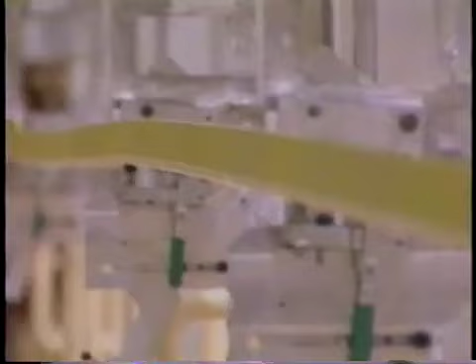Three strips of metal forming the front wing spar for the first plane were being riveted together by a huge computerized tool.

By the time this plane is completed, there will be 3 million fasteners like this one, holding together several hundred thousand parts. 18 months from today, the number one plane would have to fly.

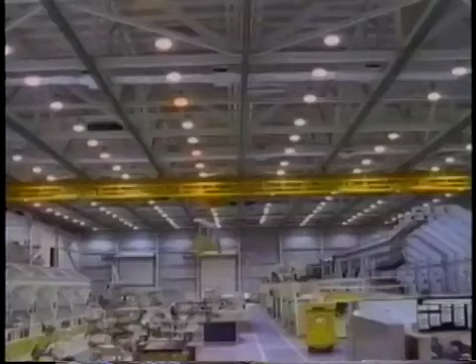But this schedule was all based on faith. Faith in a new approach to plane making that had taken an estimated $1 billion to develop. Previous Boeing airliners had sometimes suffered from costly errors in the manufacturing process. To minimize such problems, Boeing was determined to improve communications among the 10,000 people who were going to design and build the 777.

The company would adopt a new management philosophy, known by the slogan, "Working Together." For the first time at Boeing, this plane would also be designed almost entirely by computer.

The inspiration for all this came from an unexpected source. The 777 team leader recalled the lessons learned from assembling his children's Christmas toys.

Fisher-Price does the best job of any toy company on making toys that are easy to fabricate and assemble. Fisher-Price makes a little notch in their wheels so that you only can put the right wheel on the right hub, you only can put the left wheel on the left hub. You also use simple tools.

So I started saying, what we're after on this program is not just meet cost targets, not just add value to our airline customers, but we're going to do that by doing what Fisher-Price does on Christmas Eve. We're going to make this easier to fabricate and assemble.

So one time as a present, the engineering guys, after we started to incorporate all the producibility, they gave me a whole bunch of Fisher-Price toys so I could pass them out and make the points to the engineers.

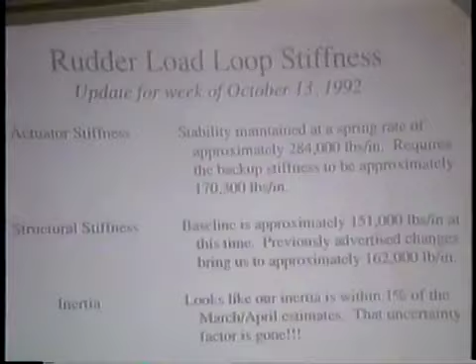Not really even close. In a computer analysis, Boeing had discovered that the rudder might develop a troublesome vibration under certain flight conditions.

You're looking at a 10 to 15% increase in rudder stiffness, or in the total loop stiffness, to solve the problem.

I'm going to head down to Australia and face the teeming masses who aren't happy with this.

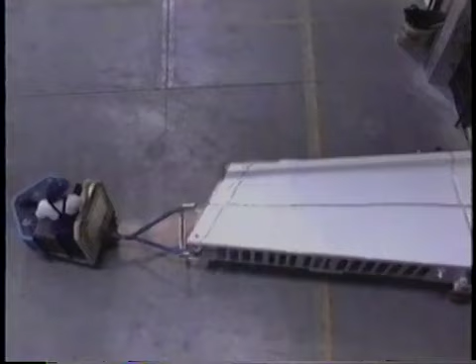The teeming masses were the engineers and executives at a small company in Melbourne called Asta. Asta had won the contract to build the rudder. Initially, they were delighted—it's a bloody big job. They were much less delighted when they got the news that the design was being changed after they were already underway on the prototype.

The rudder consisted of many carbon fiber layers laid in a precise pattern and then baked in an oven. Much of their effort to date was now wasted. I was cheesed off to blazes because of this change.

I'm not exactly that happy today because we set out to achieve a whole series of things with this particular rudder skin. We'll achieve most of them, but the thing that worries me a little bit is that the configuration will change, and it's going to change fairly dramatically. We still have to deliver on schedule. We've got a requirement to deliver this rudder in the middle of next year, and if we're late on that, it puts Boeing in a bind, and we don't want to do that if we can possibly avoid it.

In any large airliner, the rudder plays an important part in controlling the sideways movement of the plane. In the 777, powered by just 2 large engines, the rudder had a particularly important job to perform. On this particular airplane, the key task is to allow us to keep the airplane flying in the right direction if we lose an engine on takeoff. With a large twin engine airplane, it's a key part to making the whole system work.

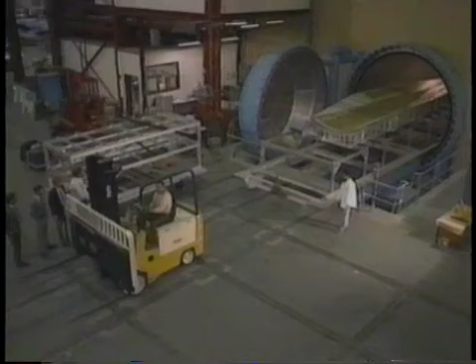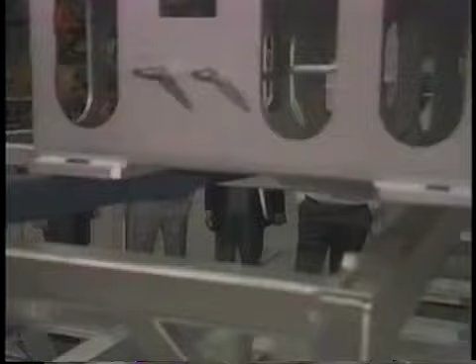The problem was an unwanted vibration involving the rudder and the piston that would move it, called an actuator. Asta was now behind schedule, but the rudder was such a key part of the plane, it had to be delivered on time or it would hold up the whole assembly and testing process. The Asta team met to discuss the situation.

What we really have to address is quite clearly the effect of all these changes that have been brought on to us by Boeing. Lovely company though they may be, they've given us a real problem insofar as building this rudder to schedule, because the changes effectively are the skin gets changed by the addition of something between 2, 4, or 6 strips or plies of tape plus some additional fabric. The actuator fittings in the actuator area become titanium, and there is a whole lot of extra machining on some of the other ribs.

There were major concerns at Boeing over whether or not the rudder would be delivered on time. Any delay could throw the whole plane off schedule. As the newly appointed director of engineering, Ron Ostrowski was worried. It complicates schedules for certain, because we wouldn't have anticipated having this problem this late in the game. We wouldn't want it this late. So, like Asta in Australia trying to produce the rudder, if we have to reinforce it, it affects them.

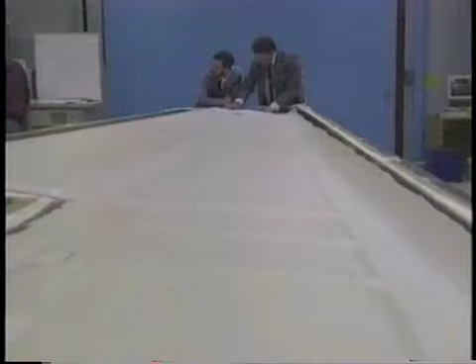But these things crop up, you know. There will never be an airplane that's perfect right out of the chute. It's too complex a vehicle to ever expect that to happen, and changes occur, and we have to just recover from those as they happen.

We've had 2 major redesigns so far, and whilst this one looks good, the previous one, the solutions there looked good too. Hopefully this one's better and this solves the whole problem, because after this, I don't know what the hell we would do if there was another stuff-up.

Another design change, or stuff-up as Tyler put it, was all too likely. Only time and further testing would tell.

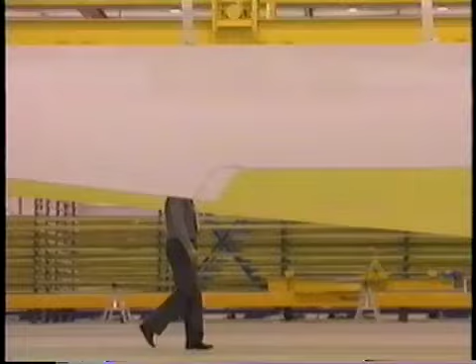In Boeing's own plant, north of Seattle, a giant machine was lumbering into action to assemble the first plane. Within a 30-mile radius, Boeing had a number of plants that were making various components for the plane. The components would then be shipped to the main plant for assembly. This is one of the largest single pieces of the plane, a carefully shaped aluminum wing panel stretching 100 feet across the factory floor.

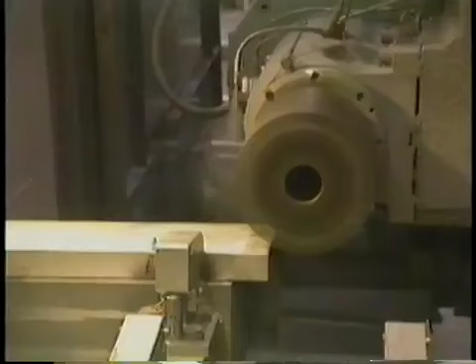The plan was that major sections of the plane, starting with the wings, were to be assembled from hundreds of smaller parts, which would be milled and shaped in the various Boeing plants. The larger sections would be transported from where they were built to the final assembly line. Between each of these stages, the growing plane would be moved from one part of the assembly line to another by a series of enormous cranes. In final assembly, the last stage before the plane left the building, the 777 would acquire its two huge engines.

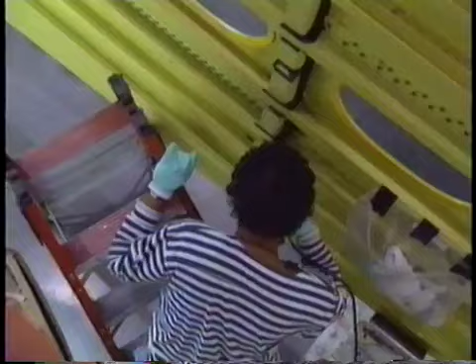But that was still 9 months away. As the first wing took shape, individual pieces were being sealed so the interior of the wing could act as a fuel tank. Glenda Barnes was one of the wing sealers.

The working together approach had definitely affected her job, compared to the way things had worked in the past. I'm a sealer, and if there was a certain bracket, such as this one, that I knew as a sealer did not need to have seal on it, but the plans as of now said to seal it, well before, I would have to submit a request stating why, and then that would have to go from one place to the next, and by then, there's 2 or 3 airplanes that's out the door, but this bracket is sealed. Now, I can pull together with the other team, and I wouldn't have to seal this bracket today.

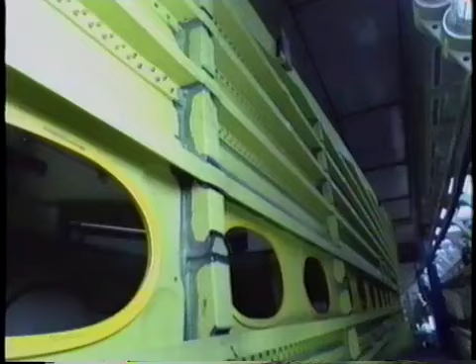That's how fast some things can happen now. Say after I have done my first two processes, I have to call quality control to come look at my process, and they thoroughly go over it to make sure I have sealed in every place I should. If I haven't, they will tape it and let me know. If I have, they give me the okay to go to the next process. I get upset sometimes if I miss something, but we all have good days and bad days, and they are there to find those things I may have missed.

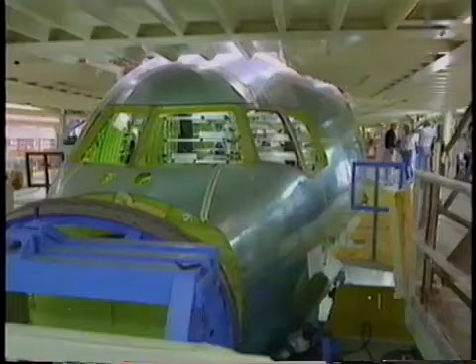Boeing calculated that their new methods had meant an 80% reduction in the sort of errors and changes they had experienced on previous planes. The floor beams had come together with an accuracy down to the 4th decimal place. They held the seat tracks, which were made of aluminum, except in the galley areas where a corrosion-resistant titanium was used.

The reason it's more subject to corrosion is spillage of pop, Coca-Cola, beer, wine, that type of thing. It's very corrosive to aluminum metals, but not to titanium.

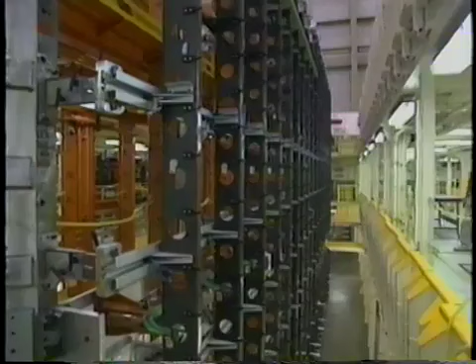You want to make sure that the seat is always held. This is one of our areas, and I know it doesn't look like very much, but it's a very concentrated area for stress when the seats, in a crash load or something like that — it's very difficult. You have to make sure you can survive a 16G crash.

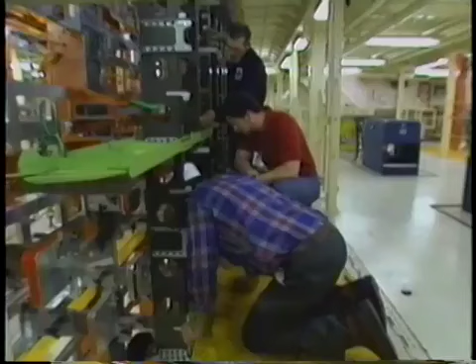In the past, the designers in their offices would have designed a component and then washed their hands of it once the drawings had gone to the factory floor. Now, they were involved throughout.

That's really interesting there — we have some manufacturing engineers working with the mechanics. These guys are from the office building, the engineers from over there, and they're coming out talking to the mechanics, something you would never see in the past.

It is absolutely the only way of doing business. Before, I couldn't find an engineer, and now today I have to ask them to leave so we can build. They have to just quit designing so we can build.

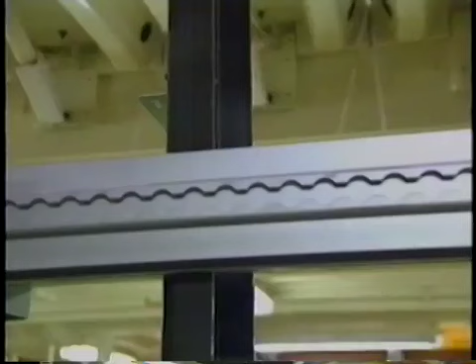The floor beams were made of carbon fiber composite, very light and very strong. A guiding principle in the design process was building a plane as light as possible to minimize fuel consumption and reduce running costs.

Wherever possible, the team looked for lighter materials that could substitute for more conventional ones. But in one case, this got the 777 team into trouble. The design of some parts of the plane called for using a new metal alloy called aluminum lithium.

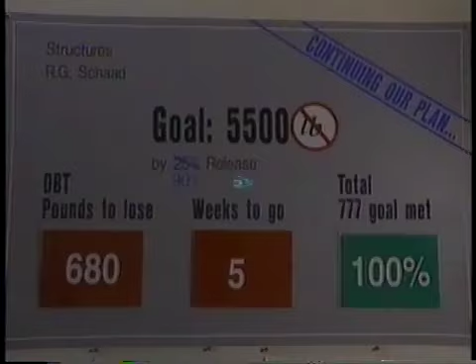Aluminum lithium was to be used in a whole range of areas in the plane. It was expensive, but it was also much lighter and helped the plane meet its weight requirements. But long after the decision had been made to go with the alloy, they discovered a problem: the new metal developed small cracks when it was drilled.

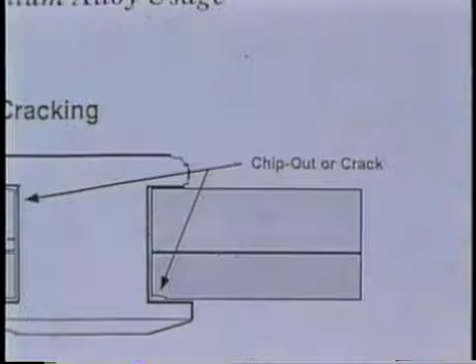Cracks are a very sensitive issue, as you can imagine in airplane design, because we go to great lengths to not have cracks, because cracks usually mean the crack can propagate or get bigger. Plus, we go to a lot of detail to make sure that if a crack does get started, we have ways of stopping it so it doesn't grow. It's just part of our normal design process.

The issue we had with aluminum lithium is that for the applications we were using it, the cracks were technically okay, but you could see the crack. So how would the customers feel about that? They could see the cracks. We'd have to say, on these parts, Mr. Airline, the cracks are okay. And they would have to figure out how to communicate that to all the people who interface with the airplane.

It was time for a decision. Already, the factory was preparing to manufacture parts with aluminum lithium. A meeting was called of all the engineers involved. Before the meeting, the halls were buzzing with rumor and comment.

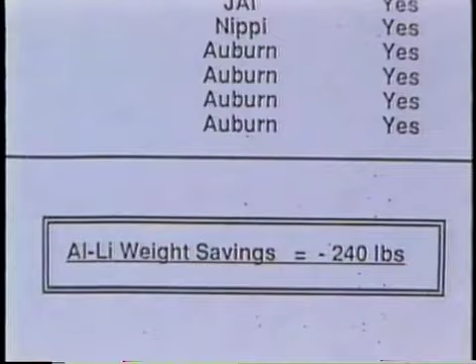They're talking about cancellation costs of like $2 million for a bunch of the applications we're talking about. And I think at the aluminum lithium meeting, we all had both opinions in our minds at the same time. It'd sure be nice to just go ahead and get that weight in the bag and done. It would sure be nice not to give the airlines and ourselves an extra problem. So you've got to be very careful not to make up your mind, and let all the different sides of the issue get out in the open, then collectively use your strength to make the decision.

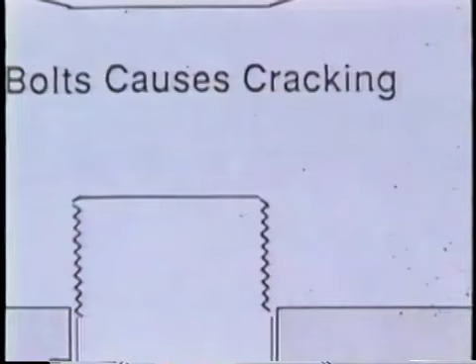So the way we try to get the best decision is to get all the pieces out on the table, see what's new, see what that means to us, can we do something about it or not? And then usually that thorough discussion leads you to the right direction. You're going to have parts here that sooner or later it's going to be discovered. Major or primary structural components like Section 12 rib stiffeners, which the airlines for 30 or 35 years, when they find a crack, they figure they don't fly till it's fixed. I don't know how big the crack's going to be after 5 or 10 years, but you have the potential here of developing multiple parts that are going to have minute cracks in them, and to the airlines, that's not an acceptable structural configuration for the airplane. It's acceptable if Boeing says it's acceptable.

Well, you've got a basic material characteristic you know about already. For example, you know you can't use it in sheet. You know you can't use it in plate. You know you can't use it in some kind of extrusions. Two more just fell off for whatever reason. You know, the handwriting's on the wall. It's just something that I think you need to listen to.

The data. Maybe I'd like to say a few words since Brian has had a chance to talk about this. The fact is that from a technical point of view, I would not put this back on the airplane if I had a choice, because we know more now than we did when we made the decision. On the other hand, I do remember that 240 pounds is still an extremely valuable weight saving for this airplane. And if we take this 240 pounds out, then I don't know where I'm going to get it. We've worked extremely hard to save weight, and we're going to continue to work hard to save weight. And so it's a balance.

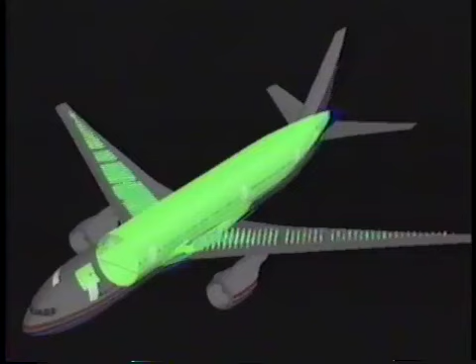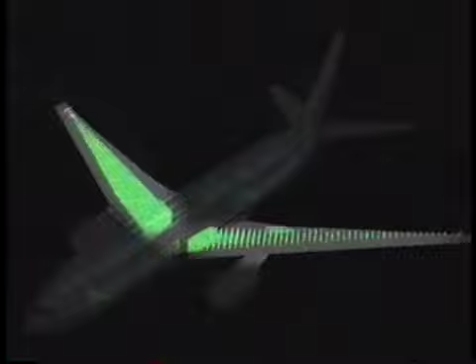The Japanese were manufacturing 20% of the parts for the 777. Some of these were supposed to have been made from aluminum lithium, including key components of the wings called in-spar ribs. Nippi, the company making the ribs, had scrambled to redesign their machine tools so that another metal could be used.

These trips turned executives into 24-hour-a-day workaholics. Business and noodles became hopelessly intertwined.

The group was thinking ahead to its visit to Nippi, just two days away. I have the materials for Nippi in my briefcase. Now, when did Nippi ship the in-spar ribs? On the 30th. Have they arrived in Seattle? Yes, they have. I saw it.

I like that. You can eat sushi with fingers too. Try it sometimes, it tastes better. I've ruined 26 neckties, and now she tells me I can eat with my fingers.

You bring the bottom end up, and then it doesn't slap around. I see you slurping. Let's all watch Neil slurp it. Want me to do it? I want you to do it. Extraordinary. Not all those, you'll never. Wait a minute, I bite them off. No, you're supposed to slurp them. Oh, look at that. Now I know why you got to be a vice president. Yeah.

Many people, including some employees, wondered why Boeing had involved the Japanese at all. Building large aircraft was one area of technology the Japanese had not yet developed. Yet here was Boeing operating on what some people called an open kimono policy.

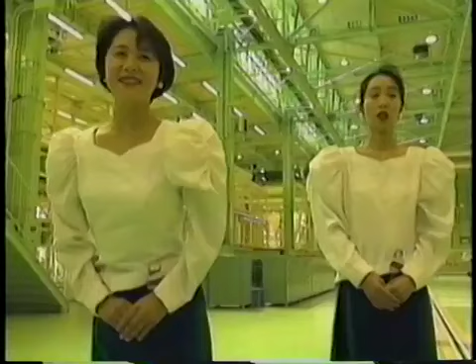But for the 777 team, this collaboration provided access to high-quality heavy engineering and equipment. Kawasaki had constructed an entire factory just to make parts for the 777 fuselage, and part of the purpose of Standall's visit was to attend the opening ceremonies. No such occasion could be allowed to pass without a Shinto religious ceremony.

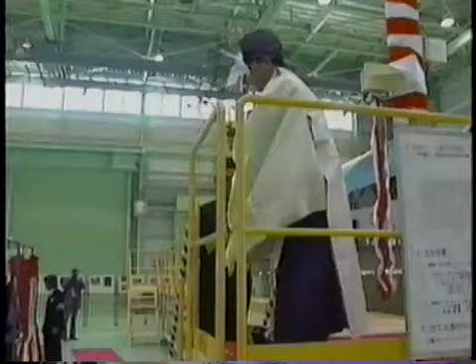This was a significant event. A priest might receive several thousand dollars for a service like this, in the hope that the gods would look favorably on the machinery and ensure that it ran smoothly in the years to come.

While Standall looked out of place with his Japanese colleagues, he had done his homework when it came to joining in.

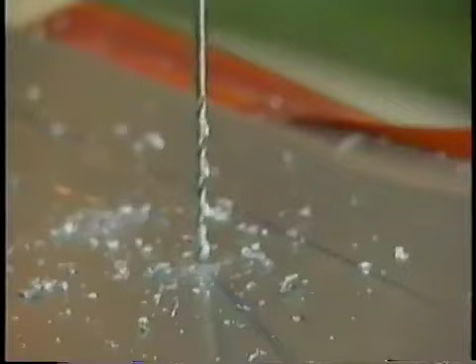The next stop was a visit to see how things were going on the passenger doors. The new design methods had made it possible for all 8 doors on the plane to have many parts in common, which saved time and effort in the manufacturing process.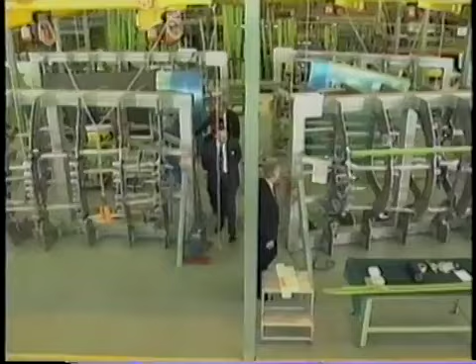In their relations with the Japanese companies, Boeing had to take careful note of the cultural differences between Japan and America. As Standall and his colleagues toured the various factories, they sometimes found problems that had to be dealt with as tactfully as possible. One of these became a worry.

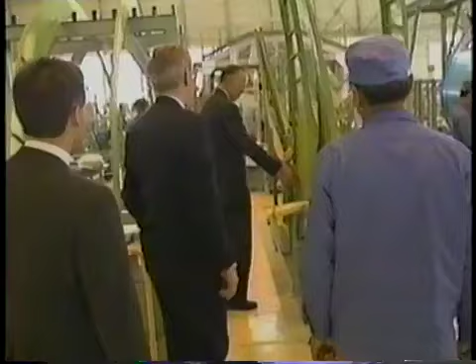About a month ago, we discovered a problem and brought it to their attention. They told us what they were going to do to resolve it. Things weren't happening. We met with them last week, which was one of the reasons we came over early. They showed us what they were doing, and it was unacceptable. We expressed our concerns to them and told them what was wrong. We had our people work with them on again, off again during the week, and we were not getting anywhere on resolving this, so we asked for a meeting with the general manager. That meeting could have been very difficult, and I couldn't sleep because I was worried about it.

Mr. Blakely was worried about it too. Neither one of us slept well. We went into the meeting, had a good open discussion, and were relieved. But it could have been, what next if we failed there? So we were worried, and I think that speaks of the relationship we want to have with them. If we were whimsical and didn't care, we would have gone to bed and gone to sleep. But we care.

The following morning, the group visited Nippi in Yokohama. While the bus was on its way to the plant, the workers were already in the middle of their compulsory morning exercises, surrounded by the 777 in-spar ribs the company was building.

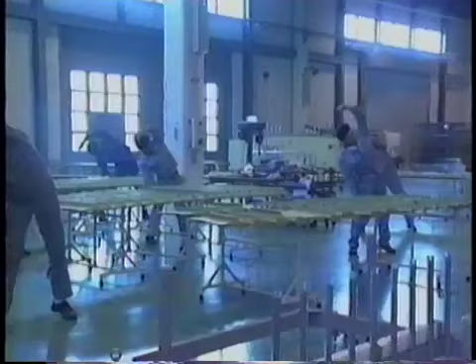Standall's visit to Nippi was partly to thank them for staying on schedule in spite of the changes in design and material. He presented the company with a certificate of thanks from Boeing's senior management.

As Standall and his colleagues left the factory and headed back to Seattle, they had mixed feelings: satisfaction at seeing how well the Japanese had learned how to build airplane parts, mingled perhaps with concern about how long it would take before the Japanese would be building airplanes on their own.

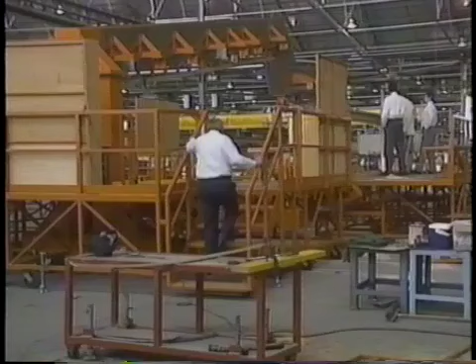In Australia, things were going badly with the rudder. The much-feared stuff-up had happened. Boeing had decided on a third major design change to compensate for the rudder vibration. It was another major setback for ASTA.

We've got a lot of major tools either completed or nearly there, and this last change is probably going to affect at least 65% of our tooling program. We've got some 600 tools, anywhere from the large layup mandrels to some of the big, huge assembly jigs to put the thing together, and it changes a lot of it.

To soften the blow, Mike Voetland from Boeing arrived to explain the changes in person. It was a difficult job at best, made worse by the fact that Boeing's engineers were still tinkering with the design as he was flying to Australia. I think we need to have a telephone conversation with Seattle to find out, between the time we left and the time we got down here, if there's anything that's changed.

Yeah, we can. Now the bad news is, as you all know, we don't have a lot of time left. I looked at the schedule last night when we got in, and it tells me that we have about 5 months and 3 weeks to complete this hardware, which is a task that I would say under normal flow conditions would take about 18 months. So we have quite a challenge ahead of us here, because the rear spar...

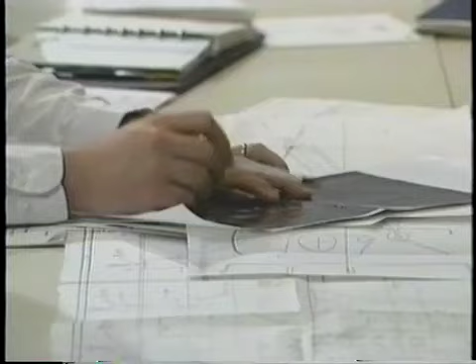As the Boeing people laid out the changes, it became obvious to ASTA that their worst fears had been realized. Are you going to change that rib as well? It looks like worst case, we hit this rib and the rear spar. That's the bad news. That is bad news. Now there is an attach plate up here, but we didn't quite have the details worked out before I left.

When we all came back from the holidays, we thought we had a nice smooth sailing program once again from the last change. They told us, for instance, several of these parts weren't changing, absolutely not. So we rescheduled the program based around that particular assumption, and now, just today, we find out that some of those major tools are changing. The addition of this fifth hinge, the changing to those rear spar mandrels and whatnot, is a big impact. It's going to be an interesting one to manage in the time frame.

Are we going to live with April the 5th? Sure, you will. I'm sure you will. That's a month after we asked for it. Come on, you guys have to give me some. Man, yeah, you guys are just... What'll happen is, we're going to give you a rudder if you're lucky.

Boeing had to keep the pressure on ASTA. The delivery date for such a key part of the plane couldn't be allowed to slip, since it would jeopardize the whole 777 project. But Voetland was clearly worried that ASTA would not be able to keep to the new and punishing schedule. Problem is, the magnitude of the workload is enormous, and the opportunity for things to go wrong is great. That's why I say I am maybe a little more pessimistic than what you might hear from ASTA.

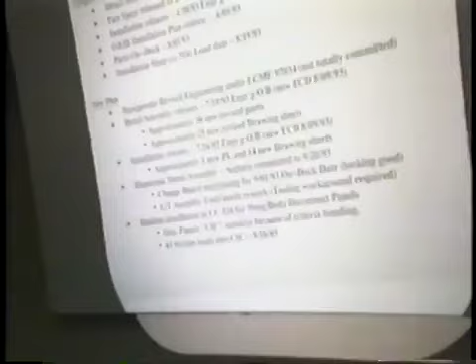At each meeting, the team analyzed the case histories of things that had gone wrong. We looked at our payloads, we looked at our systems, now we'll look at the structure. I think Wolf made a good point, which will start to show up in these next two, and that is: you miss your first commitment and then things start to go wrong. Here's an example of a fuel jettison system, and find all the pieces here.

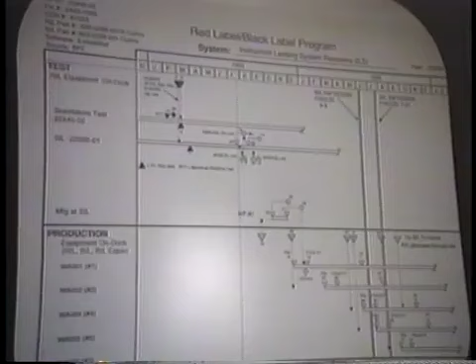When they got around to doing the installation, somewhat late, there was a problem. This will not accept the vent tube. The issue there was that the engineers had a design and they'd actually ordered the parts to build it. It's really just a tube that comes out of the outboard end of the trailing edge, and it enables the airplane to dump fuel should it need to return to the airport.

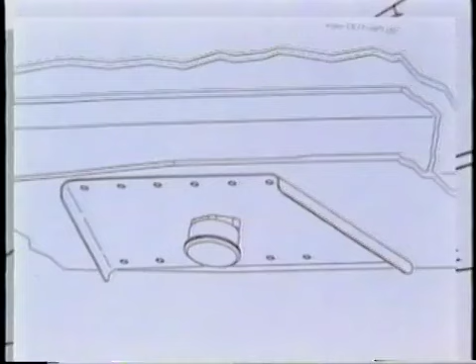When they came to work the installation, which involved other interfaces, they realized that the details and assemblies they had released prior to that time had, in fact, an interference problem. They discovered at the assembly stage that a piece called a nut plate interfered with the fasteners on the vent tube—exactly the sort of thing the new design techniques were supposed to prevent. What would that tell you to do, or emphasize, for the future?

Ideally, you'd model in all your fasteners and the nut plates, ideally. However, secondarily, if you work to the schedule and don't give up time, there is more time to recover. Here we've had a situation where we didn't get the installation done, and the surprise came later. Now it's so late that we're out of sequence.

There's enough detail in the definition as the installation's being built up that the engineer, if he's really paying attention to it, knows he's got a nut plate there. Maybe he's not modeling that nut plate, but if he knows he's got close interferences between parts, he has to deal with it. Or he doesn't have any and he needs a solution to model it in that case.

So our long-term hope is that every designer with his ME counterpart gets it to the place where they have an integrated solution, and only they can tell us that, because they're the only ones that know those pieces going together. And we had to address that so that we know who's been there.

There's a clearinghouse. At times I sit in meetings, and even now, I get thinking from time to time, boy, back on the 767 or back on the 737, this is what I did and it worked, and I get impatient, I want to pounce. And yet with the style we have and the team that we have, we are all in this together. We support one another. We don't pounce on one another.

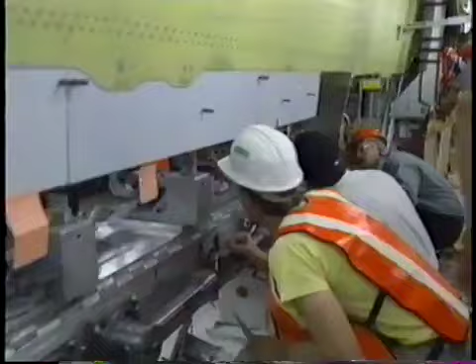Well, you better see if they all freeze. I just raised some tape around that. Pop it up. Let's just hang on now. Let it go down. No, we've got half the distance down.

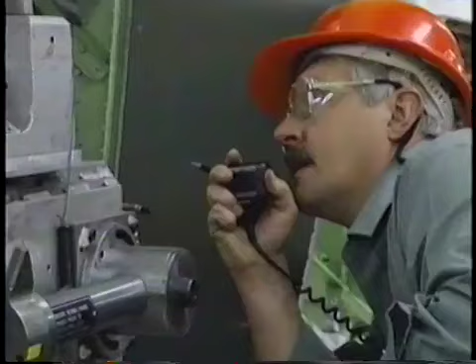Before the wing could be lifted, it had to be freed from a series of fixtures on the tool, one of which was proving difficult. In this high-tech factory, it was a hammer that finally did the trick.

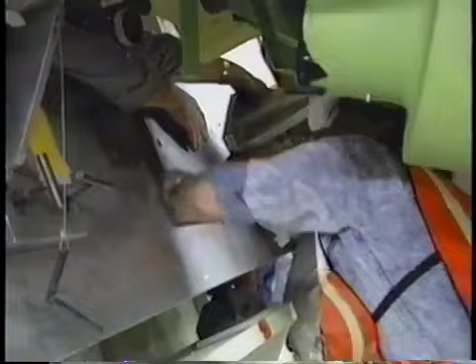This just happens to be another one, subsequent to the one in January where we loaded the spar. Now the wing. Tomorrow we'll load the stub and the keel beam. So we're just one right after the other now as far as the first airplane is concerned.

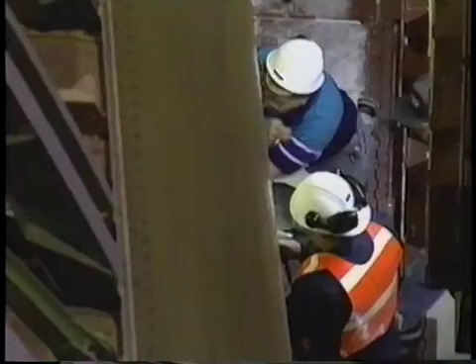This is our last locator. Let's go on back over to our positions along the wing again now. We need some people in the mid-span here. Going up! Coming up!

22 on. Okay, this thing kicked about 4 inches north here at the top edge. North. Oh, lovely.

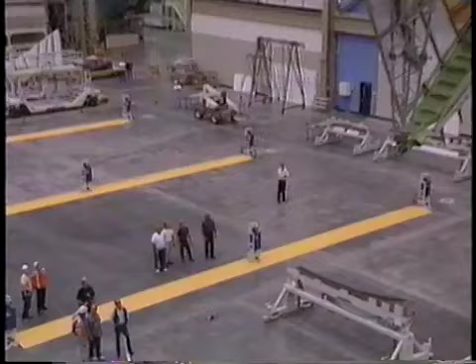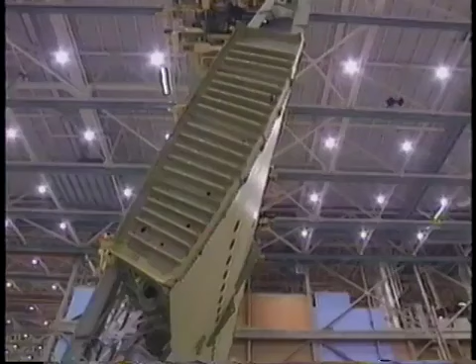The first inch was the hardest. From then on, it was slowly and steadily upwards. Everything went real smooth after we got it cleared from the tool. It was a smooth pull, smooth transition coming over. Both cabs are working real well together. There's virtually no movement in the wing when they simultaneously move, and that's a good thing to see. We're almost done, we're on the road home. We see the light at the end of the tunnel.

Looking good, Don. Perfect. All right, good job, you guys. There it is, first one. Woo!

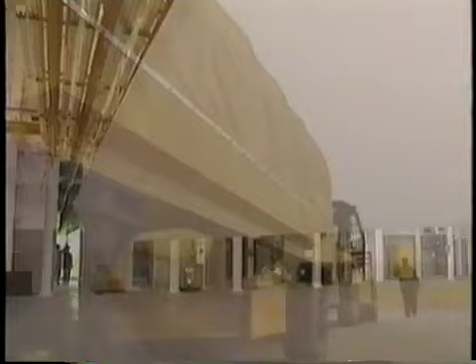While wing number 1 was on its way down the assembly line, more wing components were headed for the factory to be assembled into planes farther down the line. Today, at the Auburn factory, one of the long wing panels emerges and emerges and emerges, to be trucked to the assembly plant 60 miles north.

There were huge logistical problems in getting pieces like this to the factory just at the right time. Not too soon so they took up storage space, nor too late so they held up the process.

Like a dinosaur with a second brain in its tail, this 130-foot-long truck needed a driver at each end. There was also a third driver in a van behind to prevent nasty accidents.

I'll pick you up after him, huh?

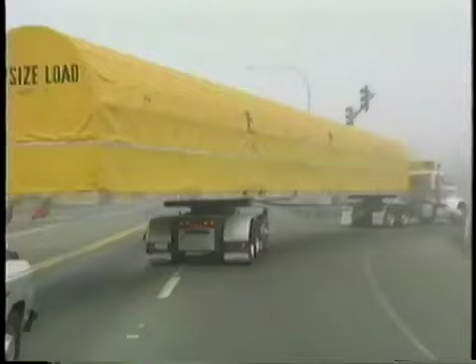As far as accidents on the road involving other vehicles and stuff, we've never had. So that's pretty impressive right there. We've had a couple of incidences with just stop signs and stuff, but other than that, nothing.

One there in the left lane. Okay, ready, thanks, I see it back there. Keep an eye on him.

Oh yeah, we've had people dynamite their brakes in front of us, so we had to go around them real fast. We had a Porsche that was going to go underneath of us one time, and then we had a motorcycle decide he was going to try it one time, but they quit real quick.

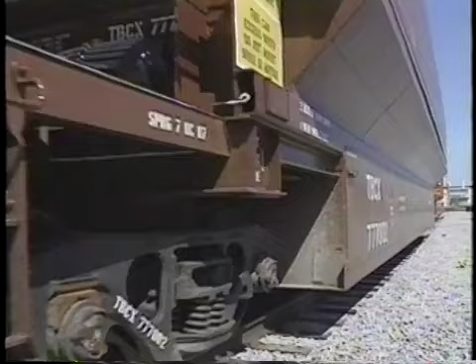Boeing has other plants across the country. A big plant in Wichita, Kansas made several key parts for Boeing planes that were shipped by rail across the Great Plains to Seattle. It was never a trip without hazards.

One of the problems we've had in the past is on our 737 aircraft, we do not cover the rail car. We've had rifle shots. We've even had an arrow stuck in the side of the fuselage when it was received in Renton. We've done things a little different on the 777, where we actually cover the rail car, so we hope to prevent some of that, although a rifle shot would still probably go through that covering, but there wouldn't be the extent of the damage that we've had on the other aircraft.

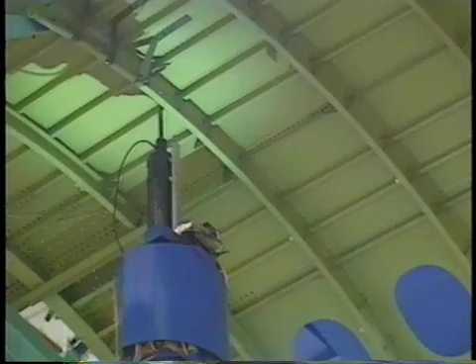More and more parts were being assembled into bigger and bigger pieces as the major sections of the plane began to take shape. The pieces were held together with rivets, fasteners that would hold them to the ribs and chords that gave the plane strength.

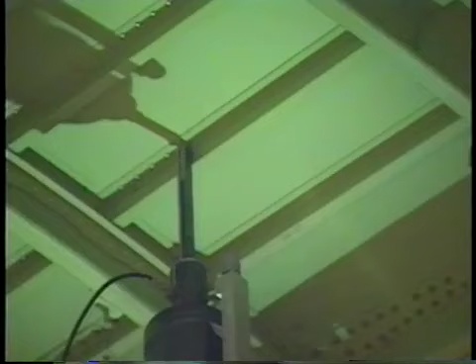This was the largest automated riveting machine in the world. It was controlled by computers. But automated riveting wouldn't work for parts that were too curved or awkwardly shaped. These would be done by hand.

The best things about this job are I'm compensated very well, really, and the atmosphere overall is fairly relaxed. I don't feel really stressed or really pushed, and that's real important in any workplace. The worst parts of it are probably that at times it does get tedious, it does get repetitious, and it gets a little noisy in here. The environment isn't always real pleasant, it gets a little warm sometimes. That's probably the worst end of it.

There are some mechanics that don't like to work on the exterior skin of the airplane because it's easy to destroy thousands of dollars worth of material in a very short time if you're not careful, and some of them just don't like to probably take the responsibility of maybe doing that.

Before complete pieces of the plane left the factory, they underwent an important procedure called an FOE check. FOE for Foreign Object Elimination. Boeing wanted to avoid having a customer find anything rattling around in the plane after delivery. A second set of initials, FOD, refers to foreign object damage. It wasn't a complicated procedure: you tipped a piece on end, banged on its sides, and hoped any loose objects fell out. One did.

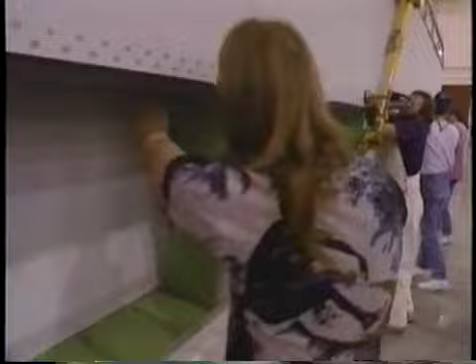We know by analyzing it that the bolt came out of our major assembly area, that in their FOD check they missed it. The pins are probably out of our secondary forward box structure area. That information will be fed back to the mechanics who run the process in those control codes, in those assembly areas.

On the other side of the Pacific, in Australia, the progress of the rudder had reached a more hopeful stage. In spite of all the design changes, the rudder for the first plane had been completed on time and was about to be shipped to Seattle.

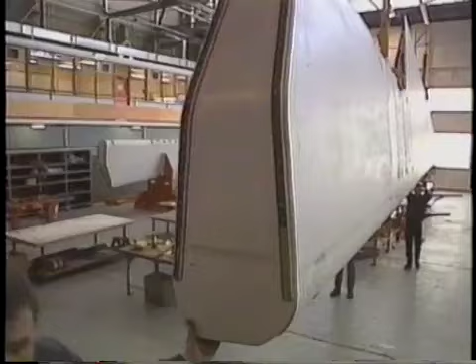But there were still one or two tiny problems, like rounding up some missing fasteners. We're now down to 6. Three are on their way on an aeroplane, and three are probably at this stage being put on an aeroplane, to get here in time so that we can fasten them up on Saturday.

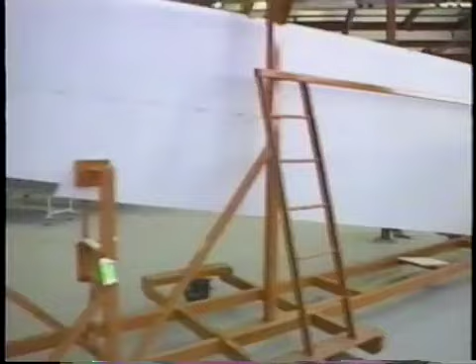Boeing wanted to get their hands on the rudder as soon as possible. They arranged to fly it to Seattle on a 747 freighter. Mike Voetlin of Boeing was in Melbourne to keep up the pressure.

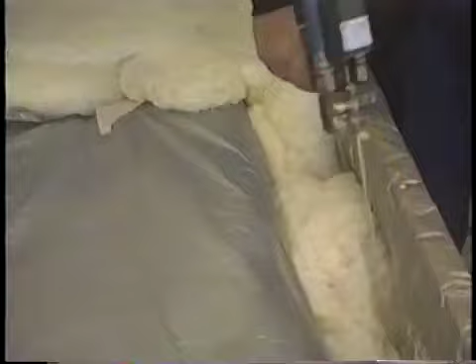Well, we wanted to, one, come out and congratulate ASTA for the tremendous job they've done. Two, we have some issues that we have to clean up this week - money, and a variety of contractual issues. And we also want to see the hardware ship out the door. We've been involved in this now for 3 years, and this is kind of the culmination of a lot of effort by a lot of people, and we'd like to see the end of it.

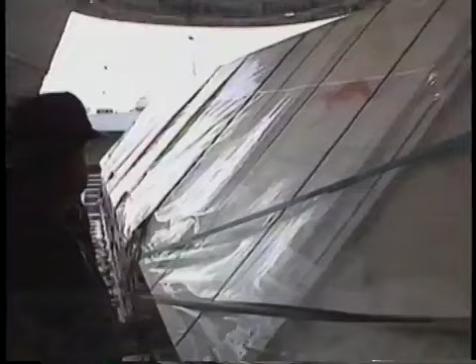We had to design a special shipping container for it. We went out to the airport and measured the door, and we have to cant the rudder at a 45-degree angle and support it in a special way, and push it into the airplane, and then we bring it into Los Angeles, and we have to put it on a truck and truck it up to Seattle on an air ride trailer. Just when it seemed to be going smoothly, there was a final snag. The rudder in its box bashed a small hole in the ceiling of the freighter.

Another first for the 777 began one Sunday morning at 6:18 a.m. The first 2 wings would be lifted into position side by side and attached to the central piece of the fuselage.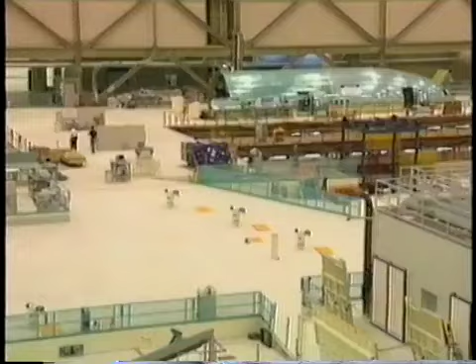It would be a crucial test for the new computer-controlled crane system built especially for the job. There was an air of uncertainty about the center of gravity of the wings, since they had acquired a lot of extra weight over the previous months.

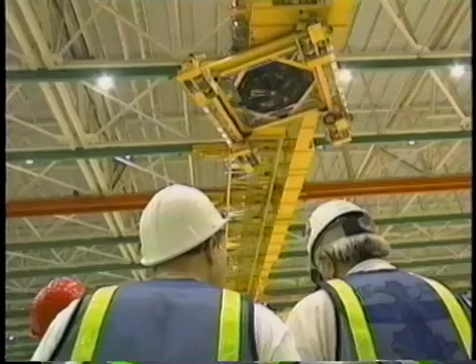We put some extremely heavy components on this wing. We've hung the nacelle strut, we've got the aft diagonal brace installed. We've put an awful lot of systems, not only on the trailing edge and on the leading edge where you can see it, but we have folks that work every day inside the wings, putting components inside the wings. We've got a lot of fuel filters, we've got fuel probes, we've got hydraulic systems, we've got fuel tubing, we've got electrical wire runs inside the wings where you can't see the things that have been added on. So that changes the weight and the balance of the wing from the time that it moved from the seal test and paint area, and then we pick it up with all of these added components, and it changes the center of gravity. No one had ever lifted this much weight with these cranes.

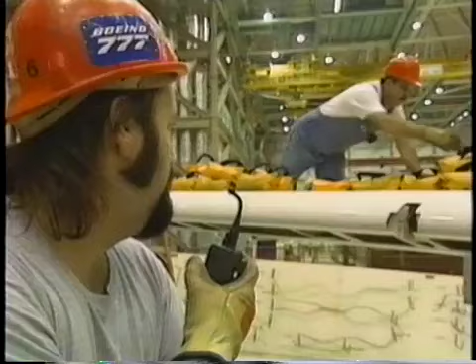Bugs in the computer software began to cause small imbalances in the tension on the 4 hooks, which then caused the crane itself to cut out. Bags of lead shot were used to even out the tension temporarily, but more work would have to be done on the software as soon as possible.

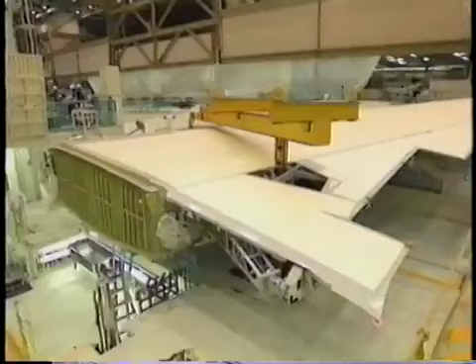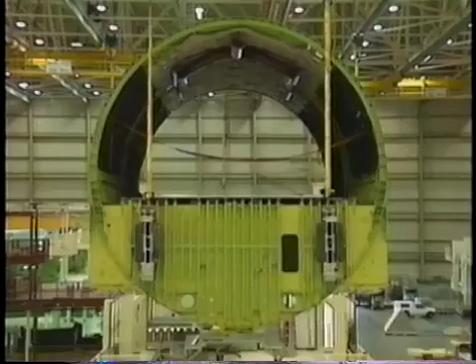Line yourself up east, yeah, inward. East and west here. We're going to hold this for a few minutes while they wipe all their ball sockets.

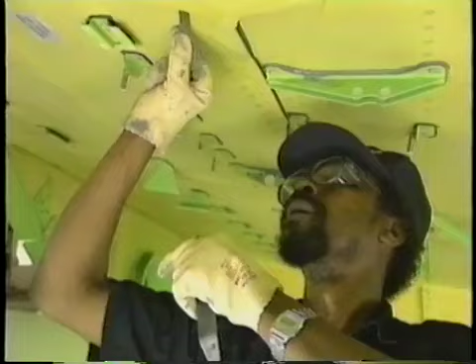Once the wings were in position, they were bolted firmly to the fuselage. Then a final quality control check for tightness.

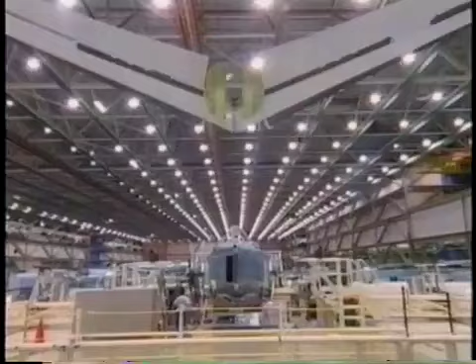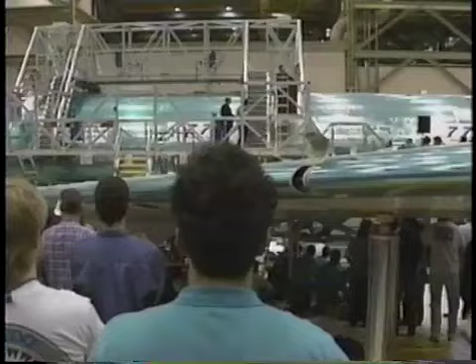Near the end of the year, the 777 team met to celebrate a symbolic milestone. It was the 777th day of work on the new plane. The team permitted themselves 3 quiet cheers as they looked ahead to what the new year would bring.

As the first year of manufacture drew to a close, the 777 team breathed a sigh of relief at the progress they'd made. But what they had done so far would later seem simple compared with the upcoming task of installing and testing a whole new range of hydraulic and electronic systems. And then would come the testing of the 2 huge engines that would have to lift the plane off the ground. Time was of the essence, for now that first flight was just 6 months away.